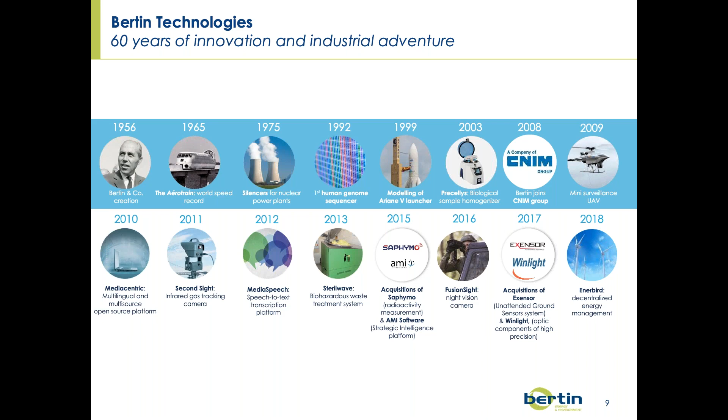And I would like to make a focus on Enerbird, our last realization, which is a system for energy management. It will optimize management of hybrid power plants. Hybrid means with renewable technologies. And of course, this is linked for optimization to energy storage, one way or another, batteries or hydrogen.

More specifically, our department named Bertin Energy and Environment is supporting the energy transition through three main activities. Innovation, that means evaluating technological innovations in the field of energy and helping to bring them to industrial maturity. It goes also with assessing security regarding environment, ensuring that systems are operating and safe, particularly industrial sites.

And broadly speaking, we are in the positive energy mood, trying to develop energy positive systems for territories such as islands, and more generally, autonomous and smart energy systems. Many companies trust us, large companies, SMEs, and you can see a short list here below.

Okay, now for the remainder of the presentation, we are going to have two main parts. The first one on the key messages from our publication on the maritime industry. And of course, we will devote a large piece of time for your questions and answers.

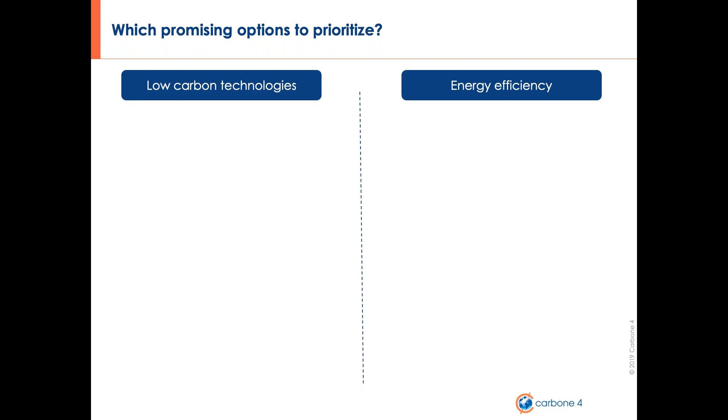Regardless of the sources and experts, the one common finding is that there are significant savings to be made from improving energy efficiency, cutting demand by up to 50 to 67% by 2050 with respect to business as usual. At the moment, two major standards were adopted by IMO since 2011, the Energy Efficiency Design Index for new ships and the Ship Energy Efficiency Management Plan for ships currently in service. These both instruments are clearly insufficient to put the sector on track to meet the 2-degree goal.

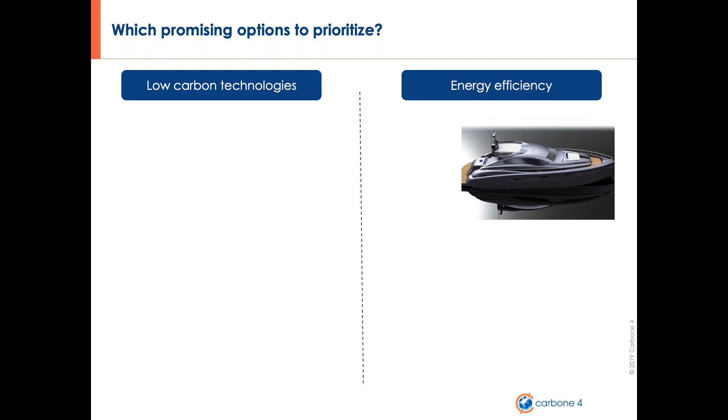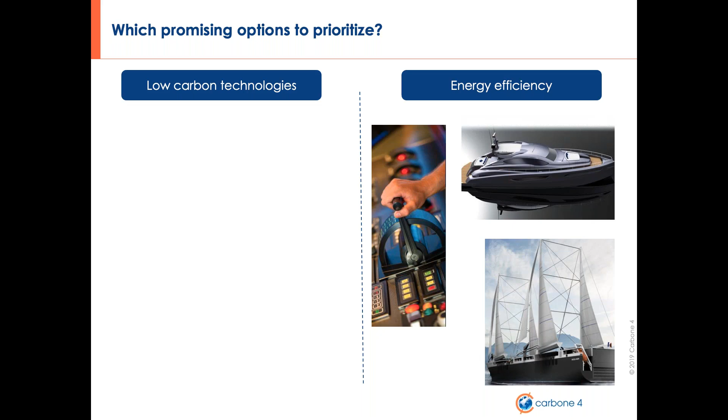Here on the right, energy efficiency levers are represented, such as enhancing the performance of engines and propellers, designing more hydrodynamic hulls, optimizing loads and routes, coming back to wind-assisted propulsion under different forms, and finally, a number of speed reduction measures are also being encouraged by France, but also by some major companies operating in the sector. It would appear then that the future of the maritime industry may partly find its solutions in the past.

Anyway, however advanced it might become, energy efficiency alone will not put the maritime sector on track to achieve the 2-degree target. We will need decarbonized alternative energy sources to replace oil-based fuel like HFO and diesel. Here on the left, the main alternative energy sources are represented. First, hydrogen and ammonia, which can mainly be used with a fuel cell to generate electricity. It should also be noted that these two molecules do not generate any CO2 emissions in their use phase, but they may cause a lot of emissions further upstream, depending on how they are produced.

Biomass-based biofuels or power-to-liquids synthetic fuels which can be produced from various feedstocks using a number of different processes, and also electricity stored in batteries. We'll not discuss the direct use of ammonia in high-temperature fuel cells or the use of hydrogen and ammonia as fuels for internal combustion engines, since these solutions seem much less credible today.

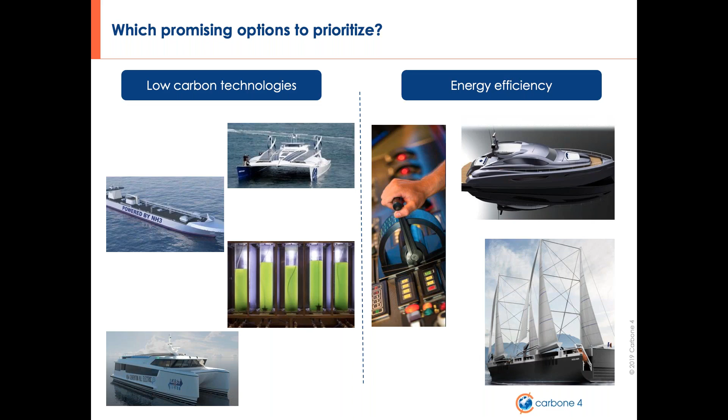So HEFA and FT are two different processes for biofuel production, most often based on different feedstocks. HEFA stands for hydroprocessed esters and fatty acids. They're also called HVO for hydrotreated vegetable oils. They are mature on an industrial and technological plan, but they can present some limits in terms of potential. Main feedstocks are oilseed crops, algae, cooking oil, or animal fats.

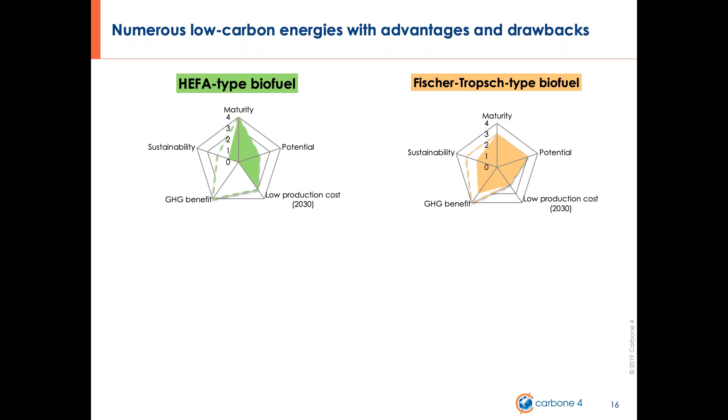Fischer-Tropsch type biofuels are less industrially mature and in general more costly to produce, but they present better sustainability characteristics. The feedstocks are very versatile, using waste, woody biomass, straw, switchgrass, etc. If well managed to obtain a correct yield during the transformation, the GHG benefits become real, up to minus 80% versus conventional fuel oil.

PTL stands for power to liquids fuels. It consists in converting water and CO2 into fuels, thanks to the combination of an electrolysis and a Fischer-Tropsch process. The fundamental technological building blocks are electrolysis of water and chemical fuel synthesis, in which hydrogen is reacted with the carbon from carbon dioxide to produce more complex hydrocarbons.

In contrast with most of biofuel-derived fuels, power-to-liquids present significant advantages: limited sustainability risks, low land footprint, virtually unlimited potential, and very low CO2 emissions if carbon-free electricity. The issue about this pathway is more about its technological and industrial maturity, and above all, its production cost, roughly 5 to 6 times more expensive than conventional fuels.

The pathway of electricity stored in batteries presents some clear advantages in terms of maturity, potential, and GHG benefits, assuming the power is low carbon. In the midterm, storage prices should even become very competitive. But of course, it suffers from known sustainability drawbacks, such as the impact on metal resources and the extraction conditions of these metals. Another issue is the mass and volume of embedded batteries, which can set some operational constraints for ship owners.

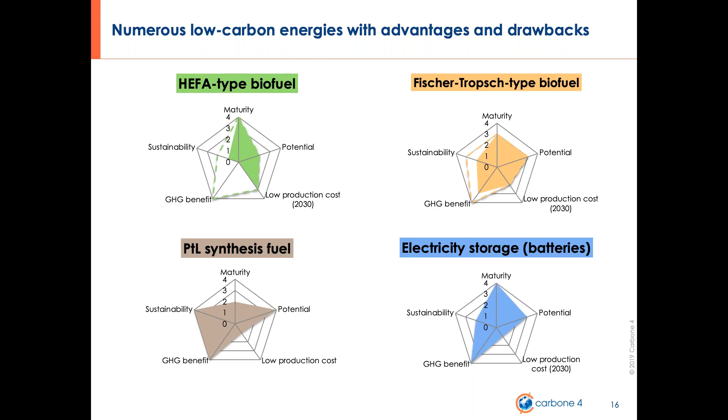Hydrogen is much presented today as the perfect energy carrier for ships in a low carbon perspective when combined with a fuel cell to produce electricity on board. Indeed, if produced with a low carbon process, notably through electrolysis of water, one can expect significant GHG benefits together with low sustainability issues and a high potential of production.

However, there are still some question marks in terms of maturity, both industrial and technological, and final price for the operator. For long-distance trips, its storage on board would be under cryogenic conditions, which is still a challenge and needs to be improved. At last, another issue is the high volume needed for the storage of hydrogen, even under its liquid form. It can be the rationale for a no-go for some operations.

Last but not least, ammonia is a means of transporting hydrogen under a more convenient form, since it requires less volume and the storage temperature is higher. A complementary conversion step is needed on board to shift from ammonia to hydrogen and then produce electricity, which degrades a little the overall energy efficiency of the process. Furthermore, ammonia has also to be produced with very few GHG emissions upstream. For information, some research is carried out to design fuel cells accepting ammonia directly instead of hydrogen for the production of electricity.

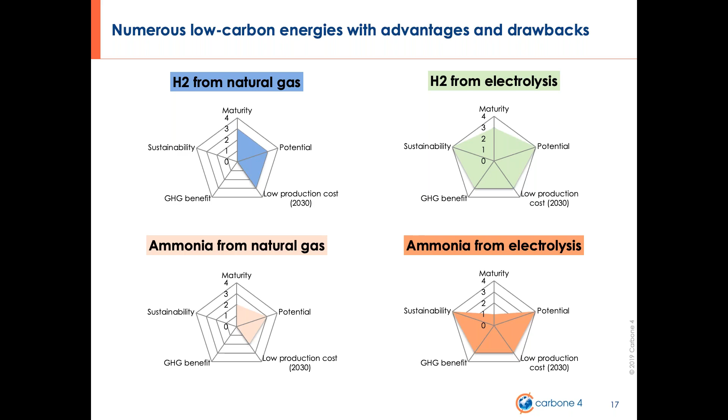First, electric battery propulsion will be used exclusively for small ships traveling short distances, typically for inter-island passenger transport. Hydrogen used to power fuel cells is also likely to be reserved for this type of ship and activity, even though it could potentially also be used for traveling greater distances owing to the high energy density of hydrogen. Alternative technologies such as biofuels and synthetic fuels will need to be adopted for long-distance journeys and larger ships.

What about LNG in this context? Its current development to replace heavy fuel oil shows this solution is particularly popular at the moment. It is indeed an off-the-shelf solution and one that will help to deal with the issue of local air pollution in ports and areas of heavy traffic. We'll talk about this just after.

However appealing it is, LNG unfortunately contributes little, if anything at all, to the war on climate change for two main reasons. The first is obvious given that this is a fossil energy carrier. As such, it offers little reductions of GHG emissions in relation to petroleum-based fuels. The figure of -20% is often quoted based on industrial data taken from test bench measurements. But feedbacks from initial studies performed on the dual fuel ships operating in Northern Europe tend to moderate this figure. The very most we could hope for would be a saving of around 10 to 15% at the operational stage, assuming, of course, that methane leaks are kept under control.

This is, of course, largely insufficient, and LNG cannot therefore be considered a suitable form of energy to meet the decarbonization targets on the long term. This being said, waiting for the other alternatives to be available on the energy market, LNG can, of course, play a transitional role. But this brings us to the second reason for which we decline to acknowledge LNG as part of the alternative energy mix for decarbonization.

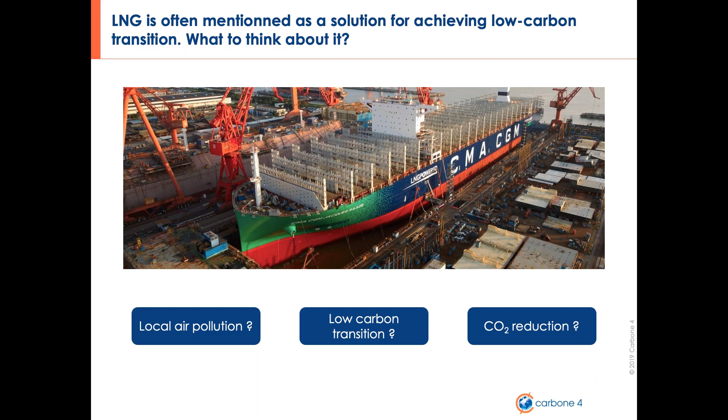Okay, we talked so far in terms of climate change on the global approach. Now focus on the question of air quality, and especially in local areas with heavy maritime traffic, and in particular in harbors. Of course, pollutant emissions impact directly air quality and directly the exposition of human beings on this air, on this atmosphere, with medical effects, and that trigger fully actions to reduce the emissions, meaning that it's kind of a virtuous cycle that is setting up.

The most spectacular on this is the decisions by IMO, International Maritime Organization, on SOx emission, or sulfur content of emissions. As everybody knows, so far, sulfur in heavy fuel used by ships was 3.5%, and it has to decrease to 0.5% by 1st January next year. And even in harbors, there are a lot of regulations requiring 0.1% on sulfur emission. Various solutions are applied to reach this goal, and now it is one really illustrative way of coordinated actions to control emissions.

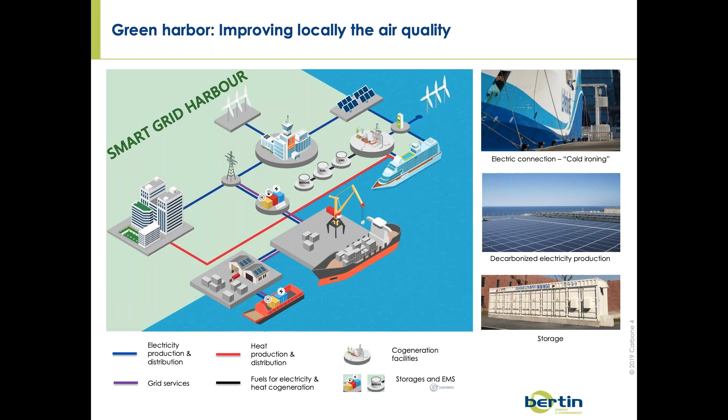Okay, thank you, Jean-Pierre.

Now let's talk about the taboo topic of growth. The IMO anticipates growth of 50 to 250% in transport flows by 2050, based on various socio-economic assumptions. Needless to say, these different rates of growth will have a strong impact on efforts to improve energy efficiency and the proportion of decarbonized energy used. In other words, the more intense the growth of the sector in absolute terms, the harder it is to achieve the 2-degree targets, which may even be impossible at a certain stage. This raises the issue of controlled growth.

It is vital that we break the taboo surrounding this issue, since international awareness is crucial if we are to find an appropriate response to the problem. Never in its recent history has humanity had to ask itself this sort of question, always focusing instead on ways to expand. It is vital now, however, that we look at the issue of regulating volumes with the aim of achieving 2 goals. The first of these being decarbonization, the second being to ensure fairness between the players involved. There is no on-the-shelf easy solution for that, for sure, but we definitely have to identify them.

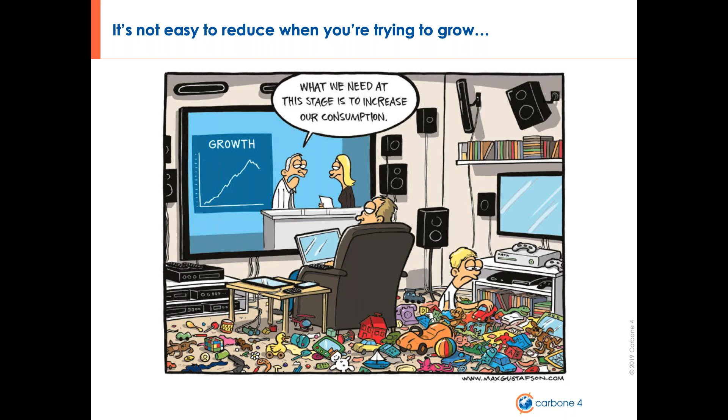If we are to analyze the current situation, it clearly appears that contradictory interests are slowing the movement towards transition. Progress is really slow. The difficulties faced by the IMO in speeding up decision-making and pushing for concrete action are real today. While the need for reducing the GHG emission is urgent, IMO is still busy in defining a procedure for evaluating the different measures envisaged. This situation is quite dramatic.

This slow pace results from the inability of states and some of the industry players to agree and speak with one voice, as aviation is able to do, for instance. The different parts of the IMO have differing views on the measures to be adopted, on the rhythm of adoption, and even on the ambition to be carried. The pressure of the NGOs is insufficient and does not make the weight in front of the states, the investors, and the major industrial actors of the sector.

That said, many actors in the industry itself push to see evidence or more proactive commitment. As an example, the financial sphere is starting to take action, with 11 major banks funding the construction of merchant ships set to start taking environmental criteria into account in their investment decisions. They have all signed up to a program known as the Poseidon Principles. Doing so, they commit to achieve the decarbonization targets outlined by the IMO.